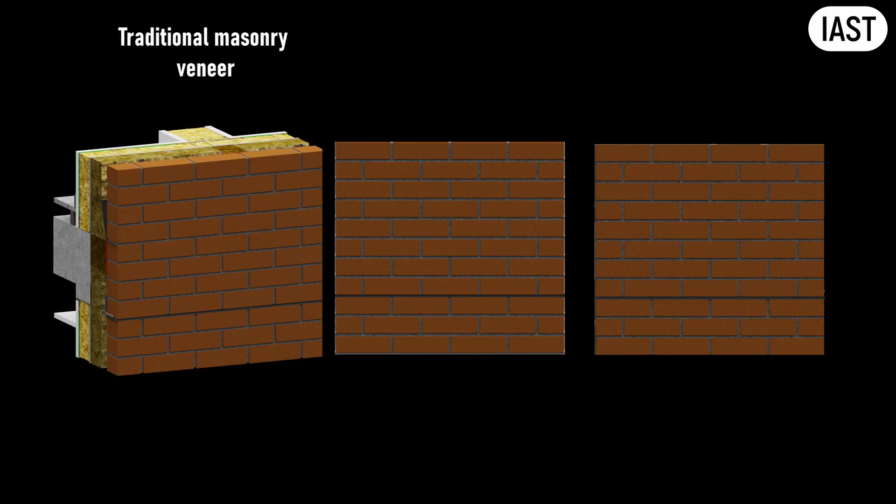The first is traditional masonry veneer. The second is steel frame with thin brick slips fixed to metal rails. And the third is insulated render system with brick slips bonded to its surface.

And here is the interesting thing. Even now, when we have seen what is inside, the answer is still not obvious, because what counts as the best depends entirely on what you are measuring.

My name is Eugene Korch. I practice and teach facade engineering, and today we are talking about brick and brick slips.

Let us start with the basics. When you have several systems in front of you, how do you actually decide which one is better? You need a framework for evaluation. Without one, the conversation goes nowhere. One person praises reliability, another talks about installation speed, a third focuses on the cost per square meter, and another prioritizes embodied carbon.

The first question is always compliance. That means building regulations, fire safety, planning requirements, and the client's design brief. If your project has passed all the required regulatory approvals, congratulations. The basic requirements are met and the building works. But that is only the entry ticket. The fact that a chosen system complies with regulations does not, on its own, tell you which option is actually optimal.

The second question is money. And this is where it gets interesting. Because money is not just the price per square meter of the system. It is a full combination of factors that determine what the facade actually costs in the end. It is logistics. Can you physically get the materials to site? In central London, for example, there is sometimes simply nowhere to store even a single pallet of bricks.

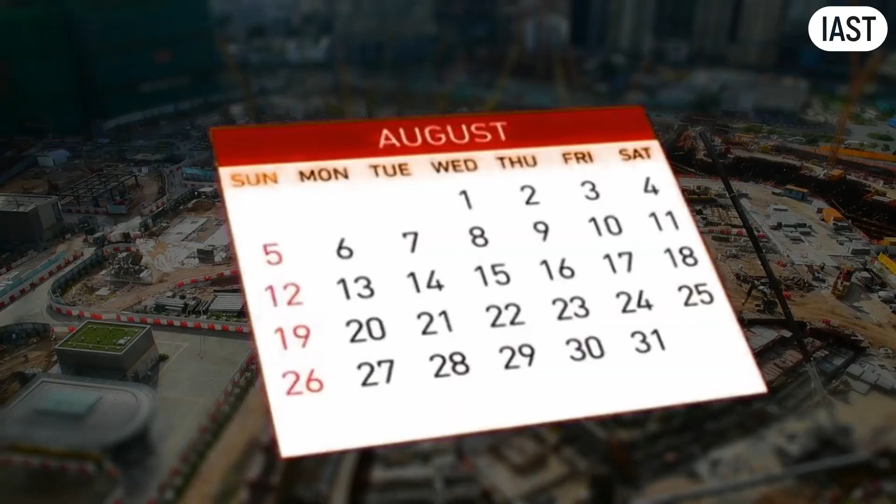It is programme. Every single week the building is not finished is a week without rental income, without sales, without return on investment. For a typical residential tower, one week of delay costs significantly more than you might expect, and the losses compound fast.

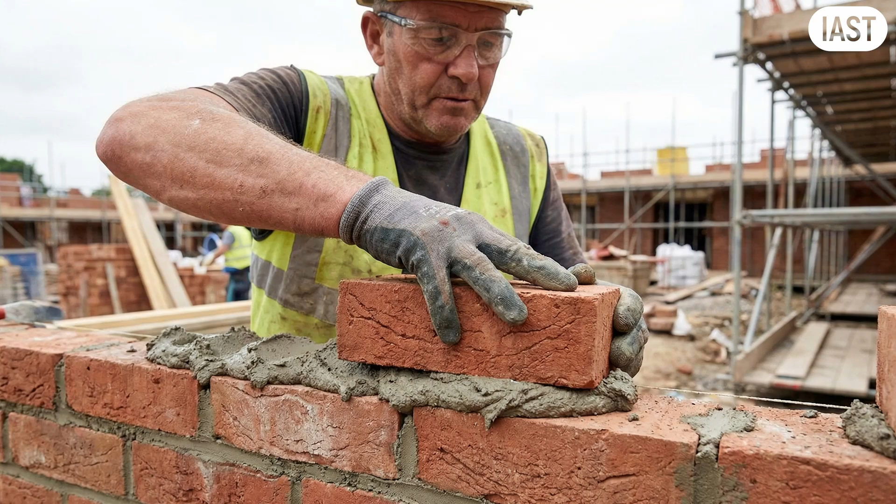It is labor. Try finding a skilled bricklayer in 2026. The average age of a UK bricklayer is 52. The construction workforce has shrunk by over 300,000 since 2019. And bricklayer numbers are at their lowest since 1998. And suddenly that cheap traditional brickwork does not look so cheap anymore.

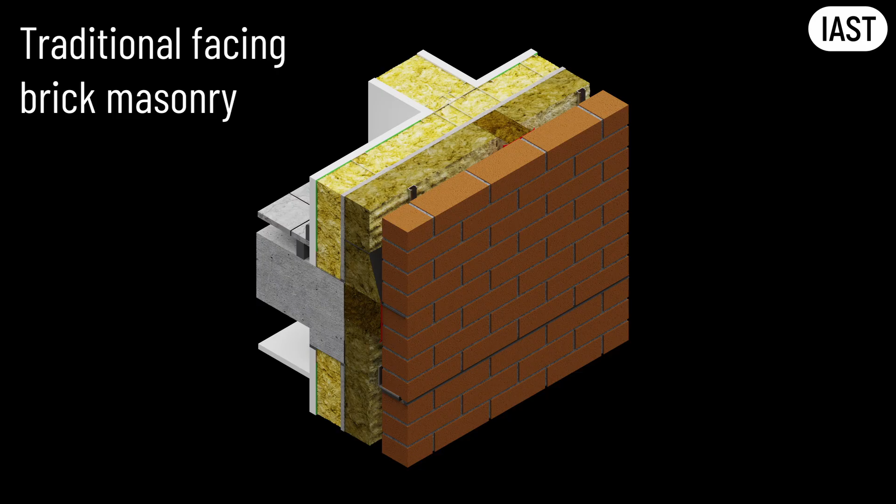So what are your actual options when you need a brick facade? Traditional facing brick masonry is the benchmark that everything else is measured against. Full-size brick, 102 millimeters thick, weighing roughly 200 kilograms per square meter, the system is century-proven and looks beautiful when it's done well.

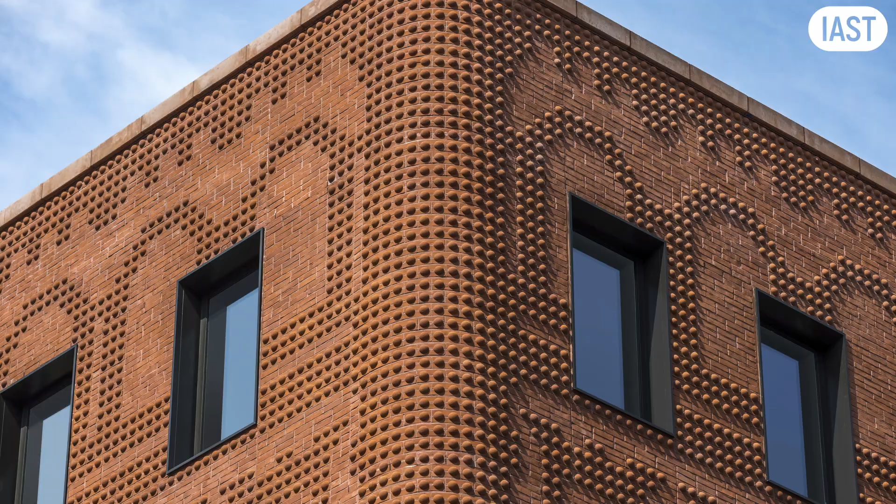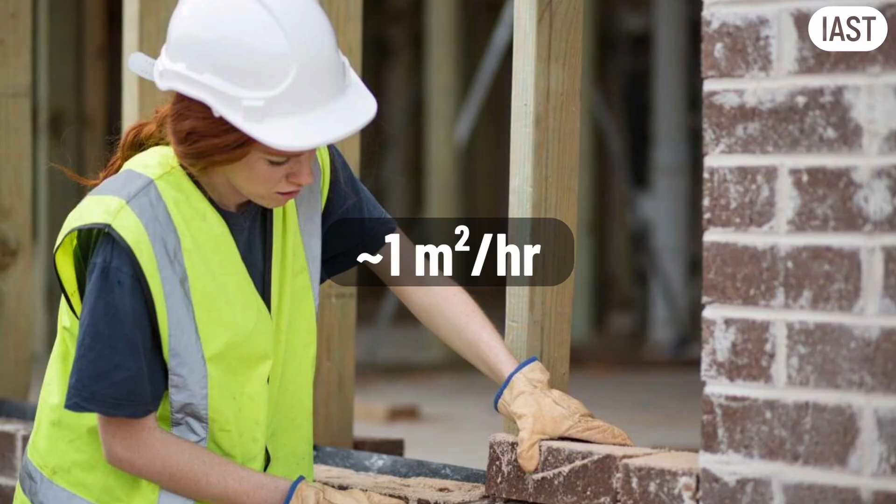A skilled bricklayer lays about 5 to 7 square meters of facing brickwork per day, which works out roughly 1 square meter per hour, and that is in good weather. When it rains or when the temperature drops below 3 degrees, work stops. Mortar needs warmth to cure, and if it freezes before it gains sufficient strength, the bond is permanently compromised.

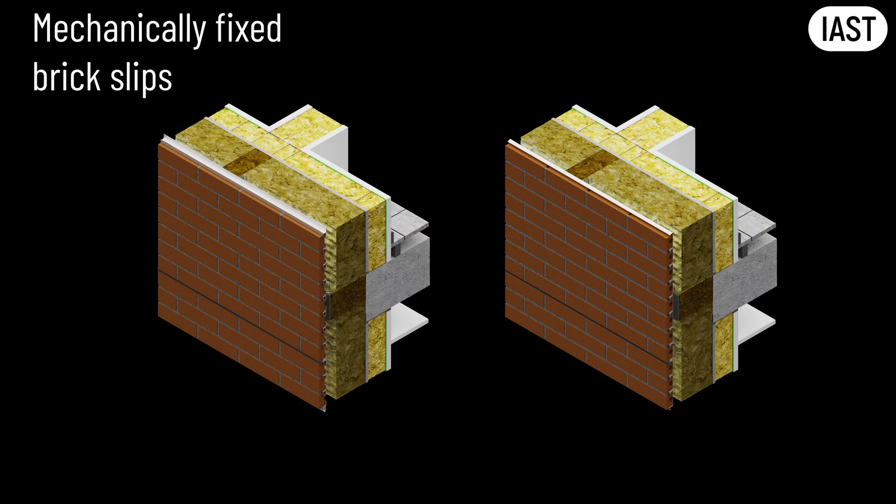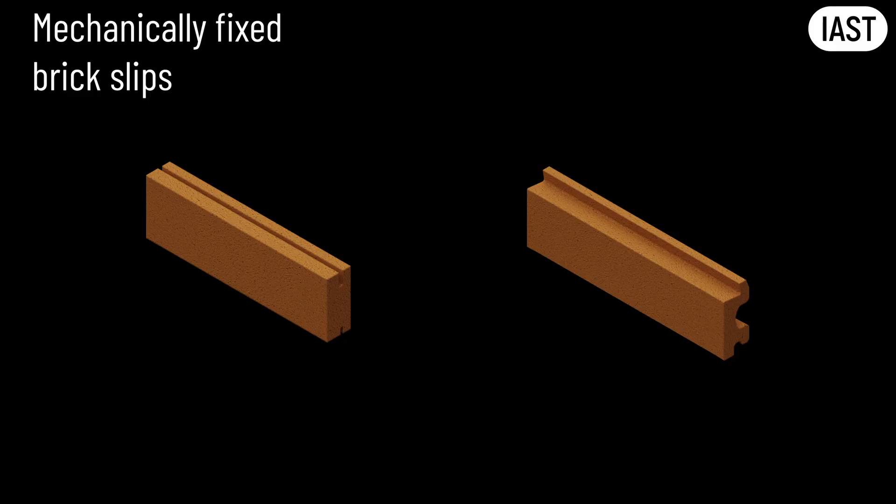The next option is mechanically fixed brick slips. These are thin brick units, typically 25 to 40 millimeters thick, that clip or lock into the horizontal metal rails fixed back to the rainscreen cladding subframe. The weight of these systems is around 60 kilograms per square meter, which is roughly a quarter and sometimes a third of the weight of traditional masonry.

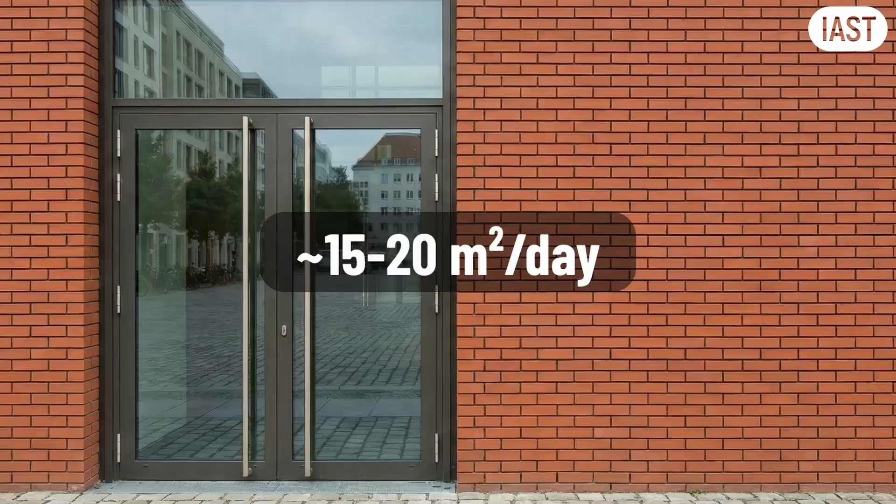That weight difference changes everything. Your structural engineer can specify lighter steel, your foundations become smaller, and your transport costs drop noticeably. Installation speed is 15 to 20 square meters per day, which is 2 to 3 times faster than traditional brickwork. You can work in light rain and at lower temperatures.

There is another practical advantage. Brick slips can be installed from mast climbers rather than full scaffolding. It's significantly cheaper and faster to set up. Traditional masonry typically requires full scaffolding.

And finally, there are adhesive-fixed brick slips. Thin, lightweight brick slips are simply glued to the substrate. Sounds ideal, doesn't it? Lightweight, simple and cheap. But there's one problem. They fall off.

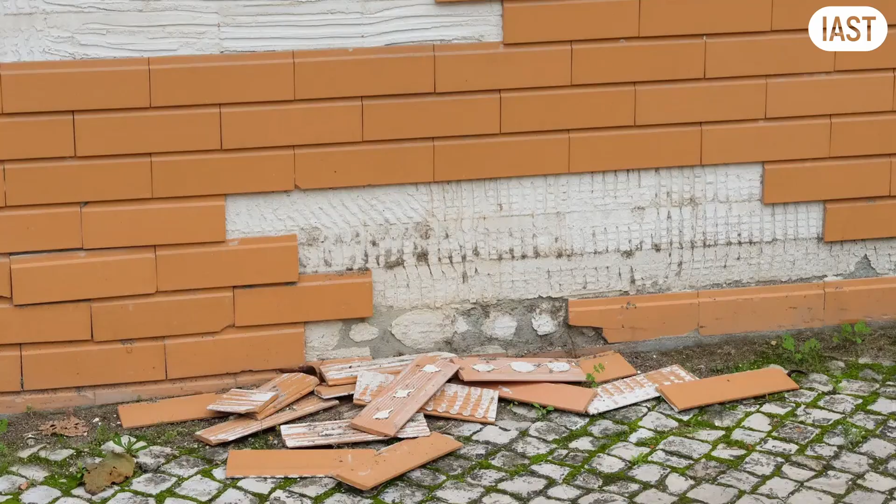And it does happen. Industry publications and building safety reports have documented cases of adhesive-fixed brick slips detaching from occupied buildings. In several of these cases, bond failures were noted after 8 to 12 years of service. Not immediately, but well within the expected 60-year design life of the building.

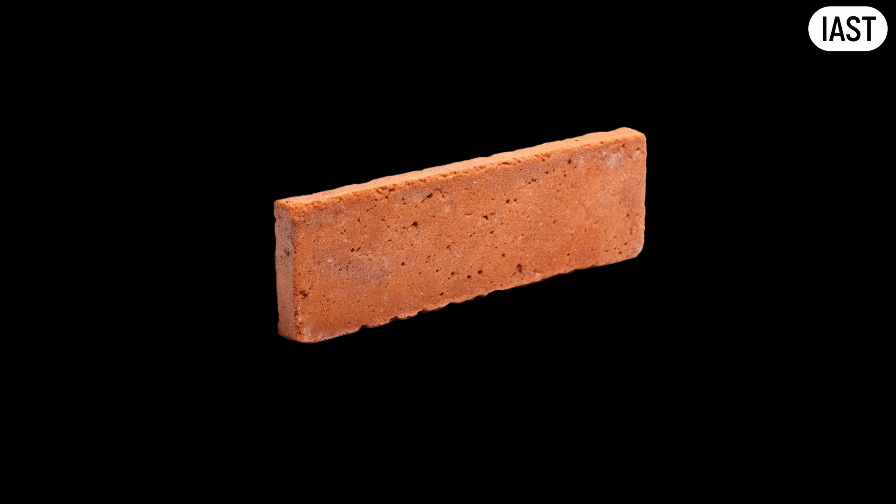Why does this happen? Adhesives are excellent materials in themselves, but most of them lose flexibility over time and become brittle. At the same time, brick slips are porous. Water gets in through the face and through the joints, accumulates behind the slips, and then winter arrives. The water freezes, ice expands by about 9%, and the adhesive bond starts to crack.

Repeat that cycle 100 times over a few winters, and something will eventually give. Add thermal movement on top of that, the facade heats up in summer sun and drops below zero in winter, and sooner or later something comes away.

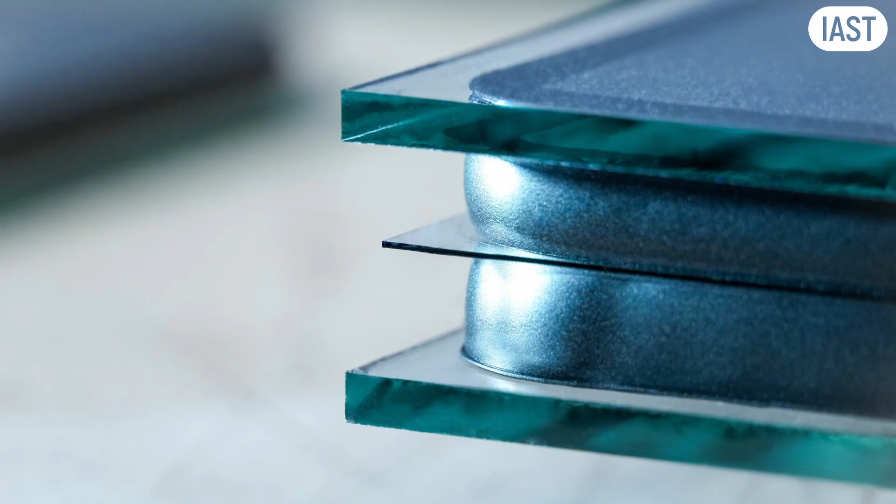Now, to be fair, modern adhesives are excellent products. When applied correctly in controlled conditions, adhesive bonds can last decades. Think of insulated glass units. Two panes of glass bonded together with structural sealant. They do not fail. They are assembled in factories where temperature, humidity, and application thickness are precisely controlled. The problem with brick slips is that the bonding happens on site.

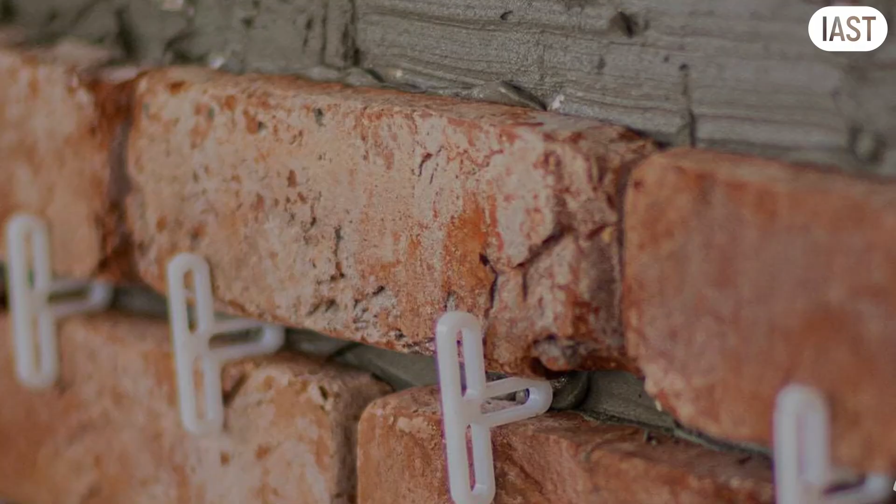If the adhesive is applied in cold or humid weather, or if the substrate is not properly prepared, or if the open time is exceeded, the bond will never reach its design strength. And on the real construction site, under real program pressure, not every single slip gets the perfect condition it needs. And that is very difficult to police.

I'm not saying all adhesive systems will fail, but when they do, there is no secondary retention. And that is the risk you need to understand before you choose one. A standard brick slip weighs around 700 grams. Falling from the 6th floor, it hits the ground at roughly 70 kilometers per hour, which is more than enough to shatter a windscreen or cause a serious head injury.

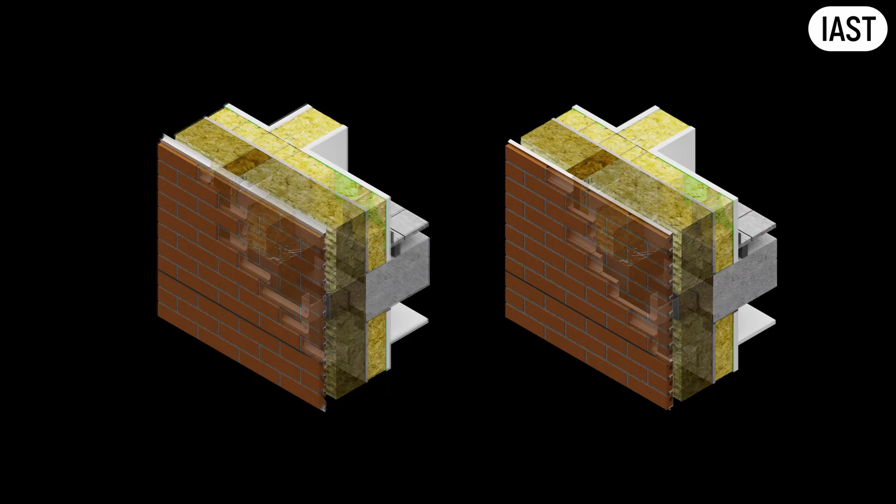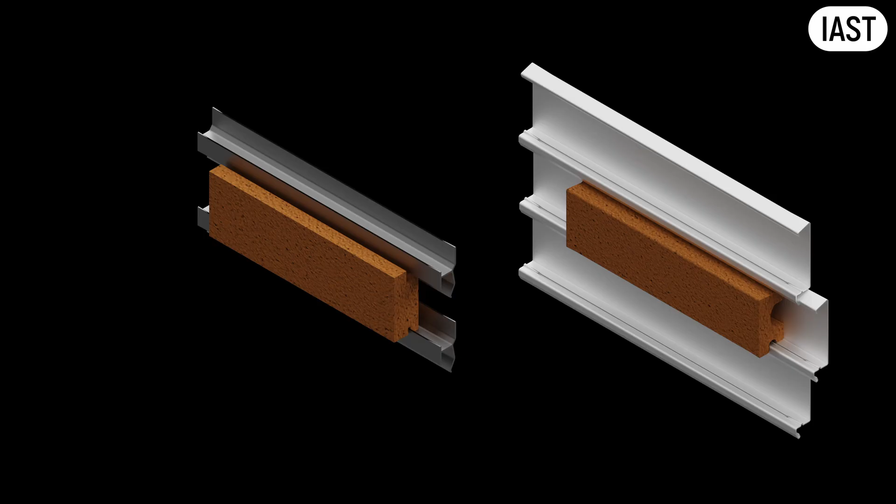Mechanical systems do not have this problem. Each slip is physically fixed to a horizontal rail. The rail is shaped so that it engages with grooves in the back of the slip or holds the slip by purpose-made mechanical features. The slip cannot fall off unless the rail itself is destroyed. And the rails are made from stainless steel or aluminum, designed to last the full service life of the building.

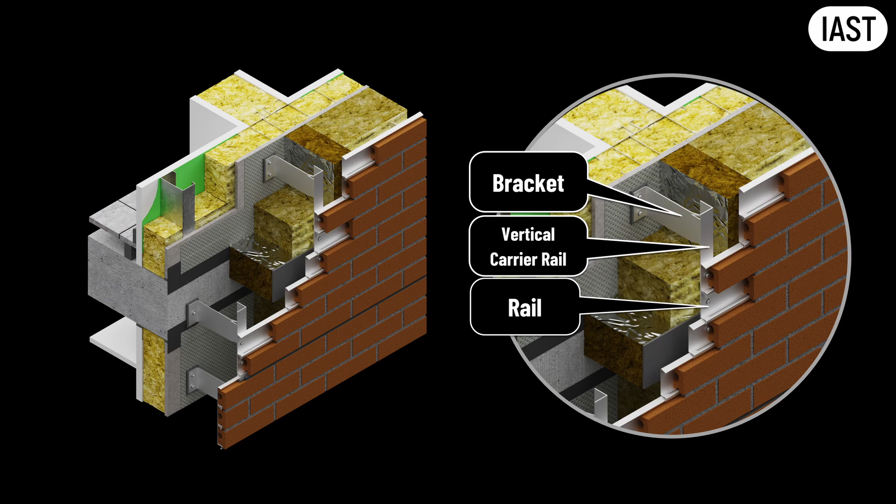The rails are fixed back to the wall through brackets and vertical carrier rails that form the cladding subframe. Each bracket is engineered for wind load, dead load, and building movement. Traditional brickwork is also mechanically connected to the structure through wall ties spaced at a maximum of 900 mm horizontally and 450 mm vertically, and steel shelf angles at each floor level or at every second floor level. It is a proven system.

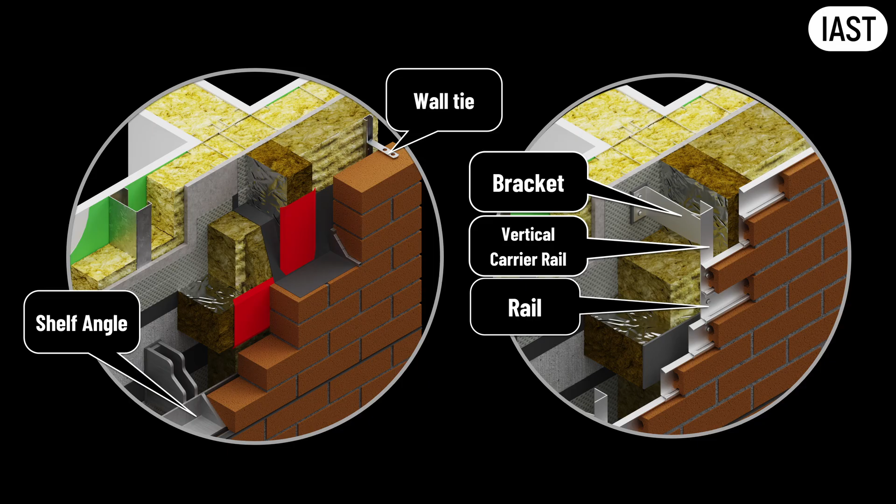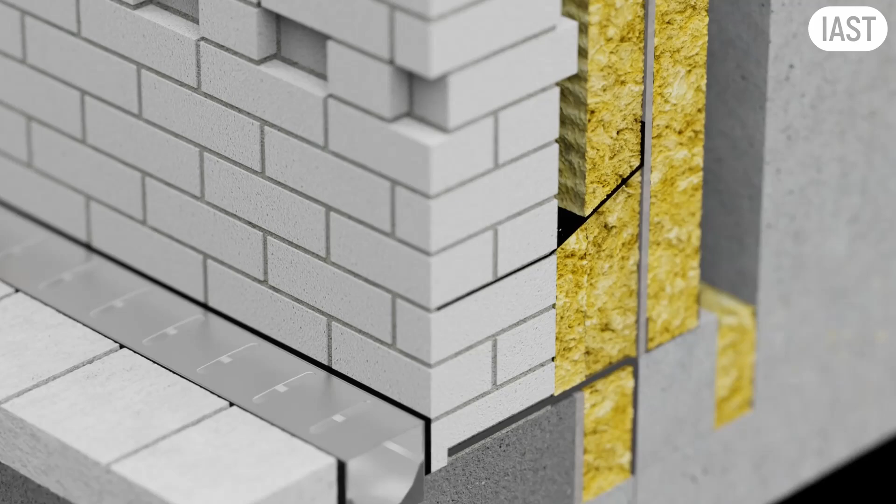Both systems have something in common. You can trace the load path from the brick all the way back to the structure. But traditional masonry has one hidden problem. Over my career, I have inspected my fair share of cavity walls. Want to know how many of them had a perfectly clean cavity?

Almost none. When the bricks are laid without sufficient care, mortar inevitably falls into the cavity. Pieces hang on the wall ties, others land on the cavity trays. Sometimes entire halves of bricks drop into the gap and get left there. And that is before you count the general construction debris, bits of packaging, offcuts of membrane, and everything else. Now, I've seen packs of cigarettes, cans of soda, gloves, and protective goggles in these cavities.

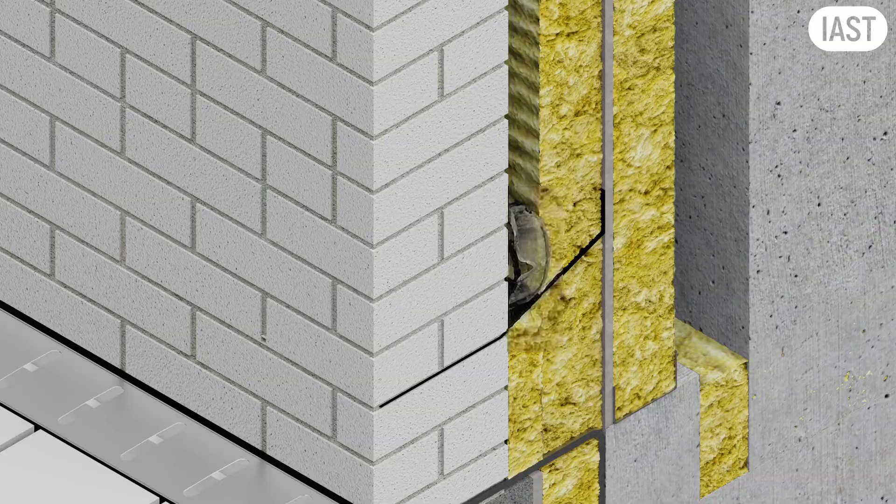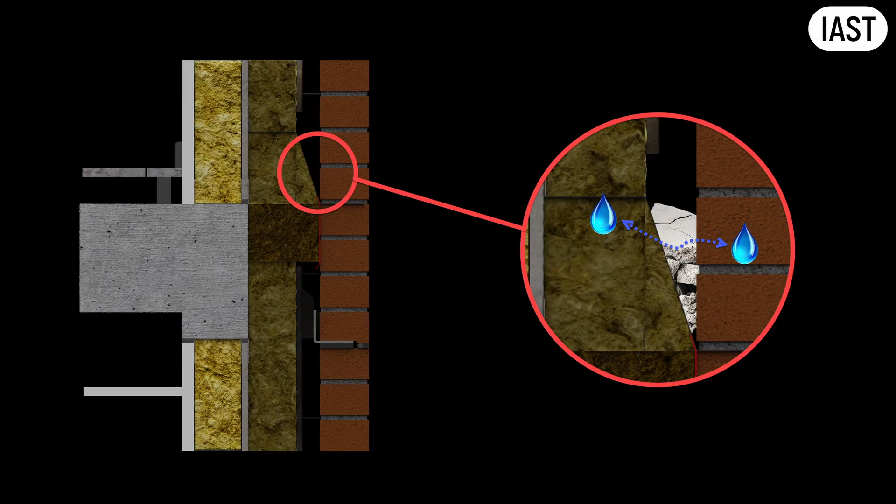This is not bad workmanship by one particular crew. This is the reality of how brickwork gets built on real sites under real program pressures with real bricklayers. Every piece of debris sitting on the cavity tray is a potential moisture trap. The cavity is supposed to protect the building from water penetration, yet it is often compromised before construction is even complete. Ventilated rain screen cladding systems also have a cavity behind the cladding, but it works differently.

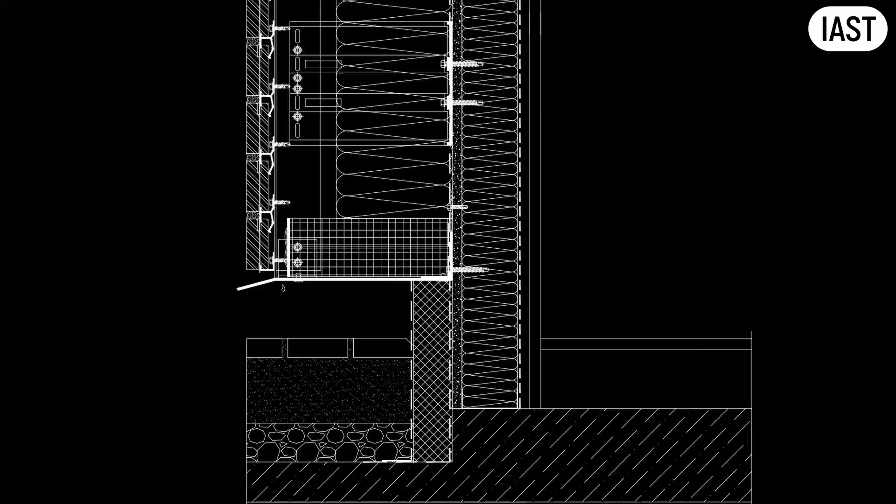In traditional masonry, the cavity is an enclosed drained space between the brick leaf and the inner leaf. It's only drained at the bottom through the weep holes. In the ventilated rain screen system, the cavity is a ventilated airspace open at the top and bottom for airflow. Both serve to manage water, but with ventilated rain screen brick slips, there is no wet mortar during installation. It is a dry fixed process, so there are no mortar droppings falling into the cavity in the first place.

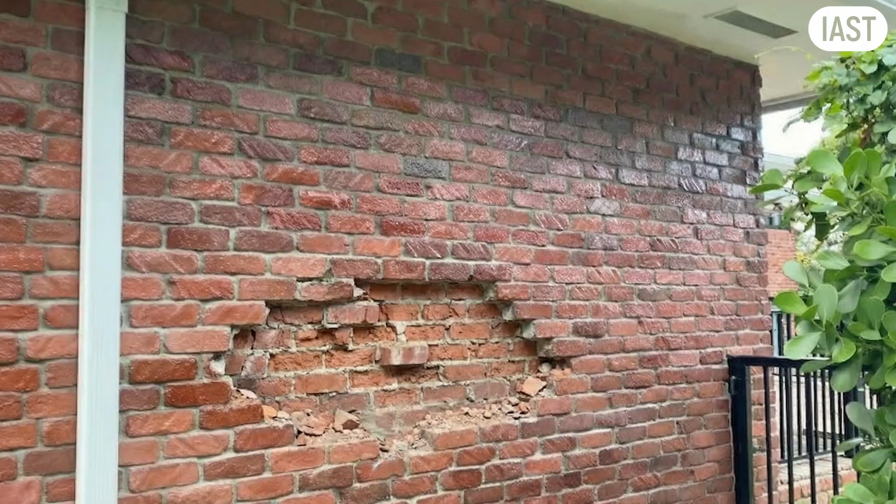Now let's talk about maintenance. What happens when the facade needs repair? This is something almost nobody thinks about until it's too late. Think about what happens with traditional brickwork. If a section gets damaged, somebody has to come out, cut into the wall, carefully remove the old bricks one by one, and then rebuild the area.

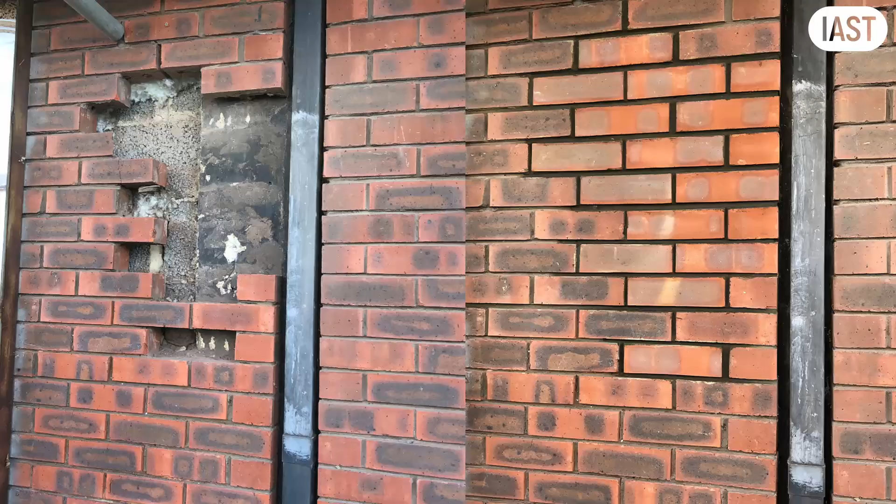On top of that, they need to find mortar that matches the original color and somehow replicate years of natural weathering on the surrounding surface. However, the patch will always be visible, and there is nothing you can do about that, especially on a building that is more than 10 years old.

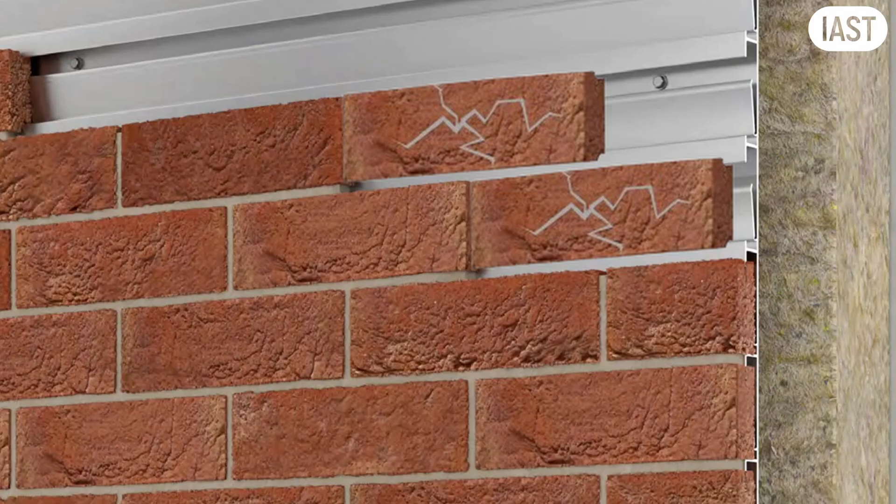Now compare that with mechanical brick slips. If a slip gets damaged, the repair is straightforward. The installer scrapes out the pointing around the damaged unit, disengages the clip, slides in the new slip, and points it back up. The whole process takes minutes rather than hours. You are replacing like for like, the same product, the same color, the same texture.

The new slips will look slightly different until they weather in, but you will never have the color mismatches you get when you're trying to patch traditional brickwork. And the whole process is significantly faster and easier. Over a 60-year building life, any facade will need repairs at some point. Vehicle impact, storm damage, vandalism, window replacement. It is inevitable.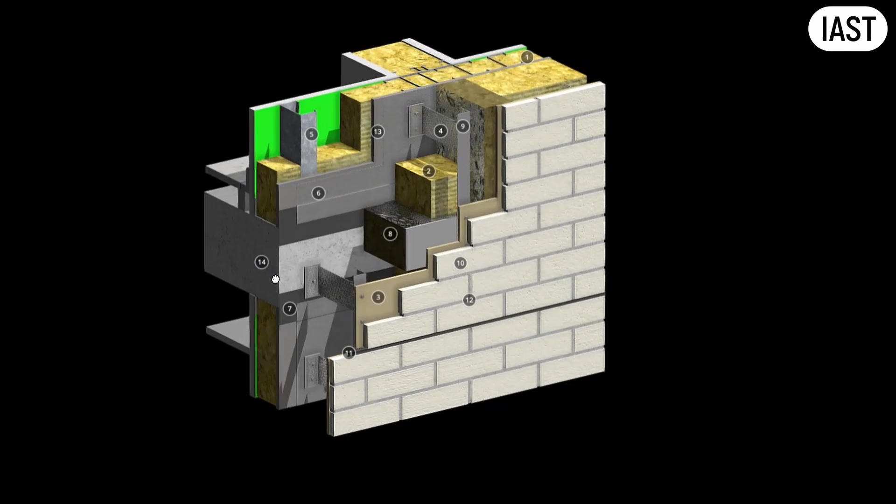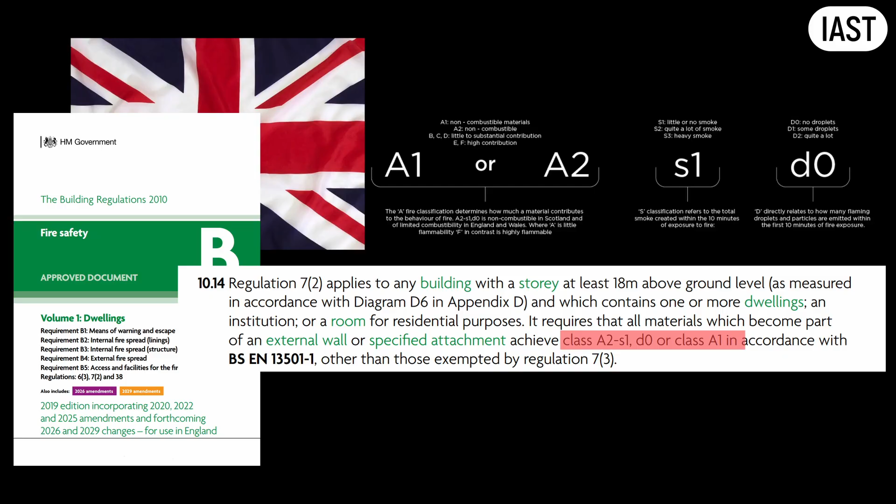There's one more thing you absolutely need to know. The regulatory landscape has transformed. In the UK, for residential buildings above a certain height, every material in the external wall must achieve A1 or A2-s1,d0. In simple terms, materials that do not burn, produce toxic smoke, nor flaming droplets. Other countries have similar height-based fire restrictions in place, so wherever you are building, this is something you need to check early.

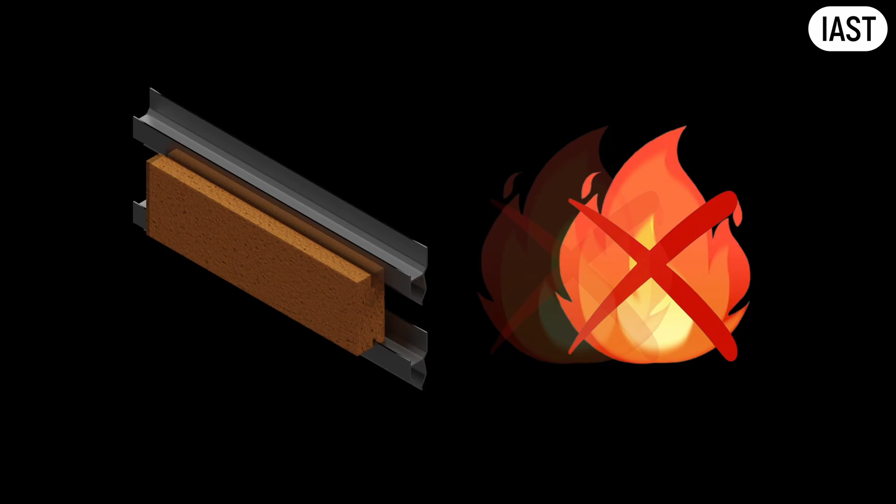And this requirement immediately eliminates entire product categories. Certain insulated panels, adhesives, certain backing boards, they are all gone from high-rise specifications. The good news is that clay brick does not burn, and mechanical brick slip systems made from non-combustible components do not burn either, so they pass the fire test at any height.

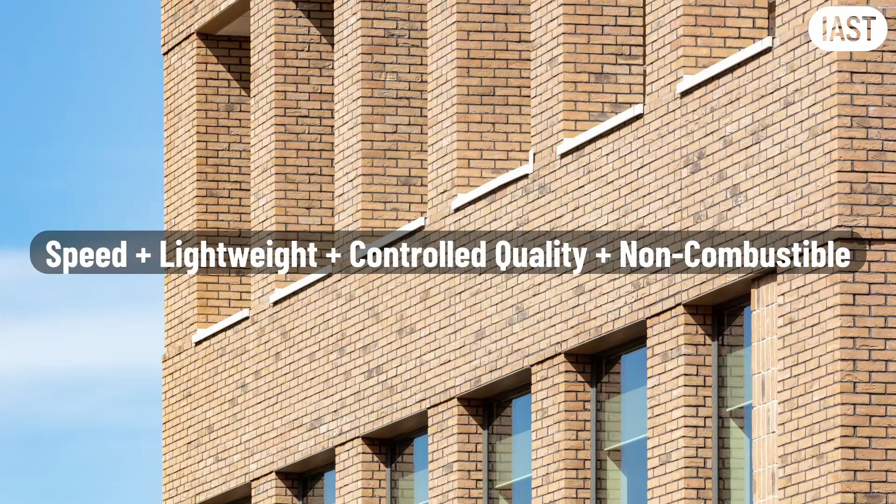So which facade type is the best? If you have unlimited budget, plenty of time and access to skilled tradespeople, then traditional masonry remains an excellent choice. It does not burn, it is century proven, and it looks beautiful when done well. If you need speed, a lighter structure, better quality control and a fire rating that works at any height, then mechanical brick slips are worth a serious look. This is the fastest growing sector in the brick facade market.

If your building is below 11 meters and cost is the driving factor, certain adhesive systems may work, but make sure you understand the retention method, check the track record of the specific product, and think carefully about what is below, at the ground level. The answer is not the appearance. From the street, all three facades will look identical, and that is the whole point.

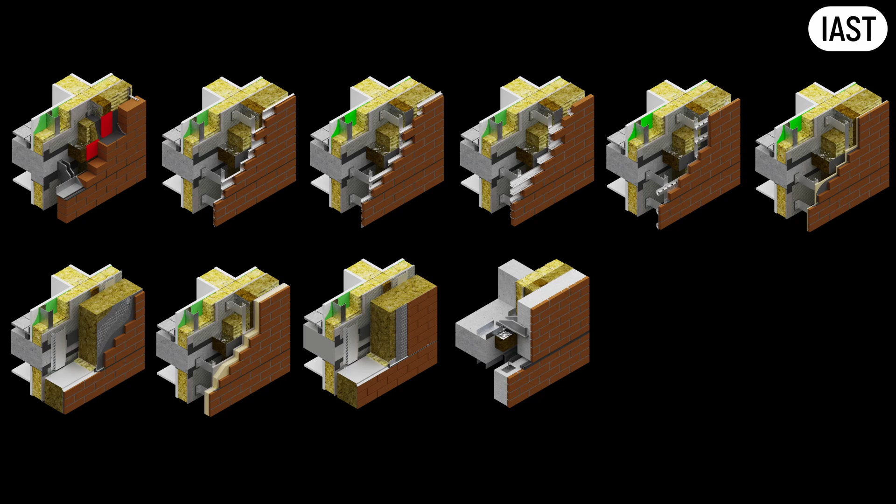The real answer lies in understanding your specific project, its site constraints, the available labor, the program pressure, and your appetite for risk. And that is the real skill of facade engineering. It's not about choosing the abstract best system because there is no such thing. There's only the right system for a given project.